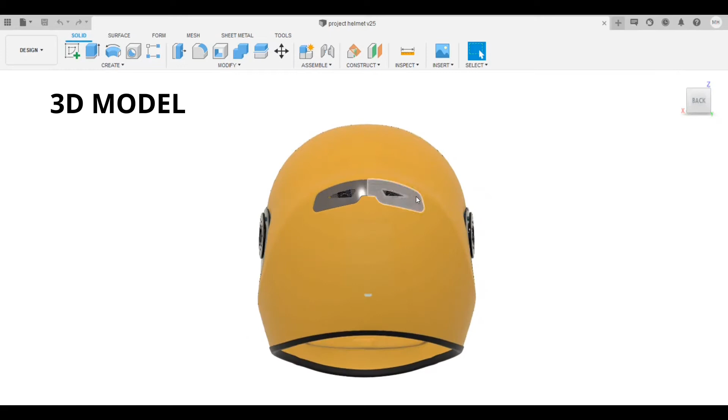Now, I will show you the 3D model. The LED will be placed inside the helmet, where the visor can reflect the light. You can see at the back part the placement of the sound sensors, and at the bottom there is a rechargeable module with the micro USB interface. Now let's see all the placement of the electrical components. You can see that all the electrical components nicely fit the helmet design.

Static stress analysis was performed on the helmet using Fusion 360 software simulation. The model of the helmet is prepared in Fusion 360 software, and it is based on the shell alone. Analysis is performed with 3 different materials. The first one is carbon fiber. The next one is ABS plastic, and lastly polycarbonate.

The designed product will be tested with a 3,432 Newton load, which is when the conventional fiberglass helmet has major deformation when the force is applied to it vertically. This is to replicate the hydraulic press.

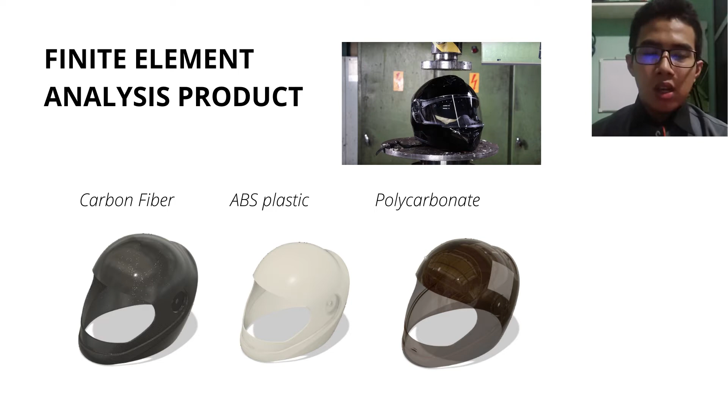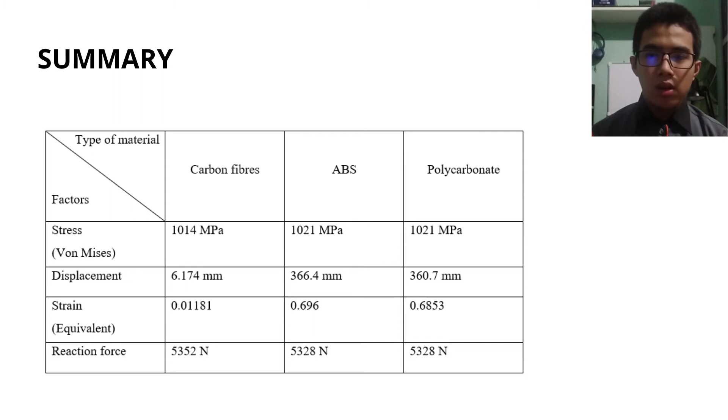From the result, we can conclude that carbon fiber is the most suitable material since it experiences the lowest stress, resulting in the lowest strain. Moreover, carbon fiber has very slight displacement compared to the other two that almost completely deform. Lastly, carbon fiber also has the highest reaction force.

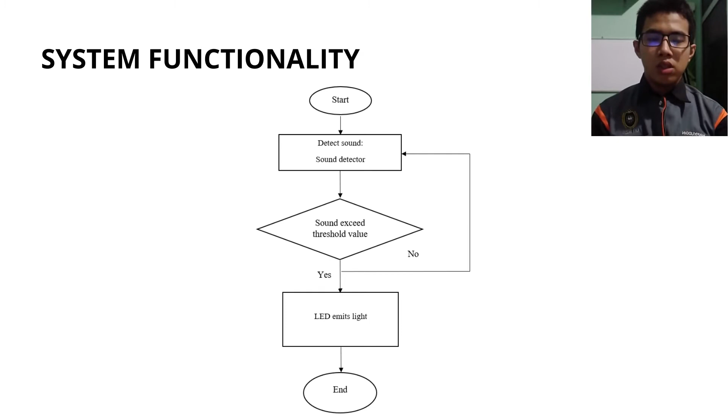How the system works is the sound must exceed the threshold value. Then the LED should flash light as the output. The sensitivity of the sound sensor can be adjusted using the potentiometer on the sensor itself.

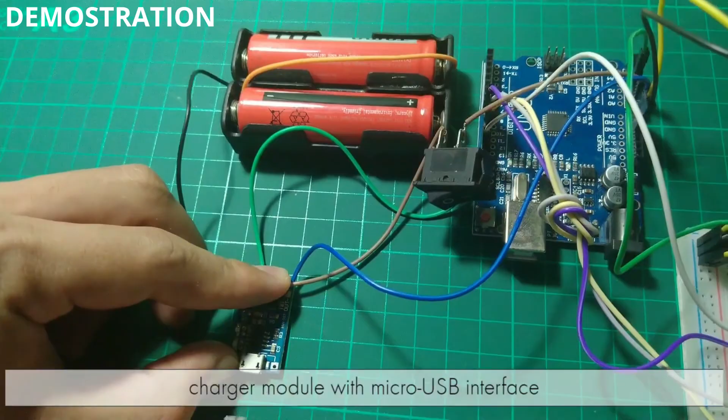In Malaysia, the driver is recommended to be 2 to 4 seconds behind the front vehicle. This is considered the safest distance. In order to test the functionality of the system, an experiment was conducted to detect a car horn and also a motorcycle horn at 3 different levels of distance, starting from 4.7 meters, that is about the length of an SUV car. The second one is 9.4 meters, double the original distance. And lastly, 14.1 meters, 3 times further than the original distance.

Typical car horns are rated at approximately 107 to 109 decibels. Meanwhile, a motorcycle horn is rated around 96 to 105 decibels.

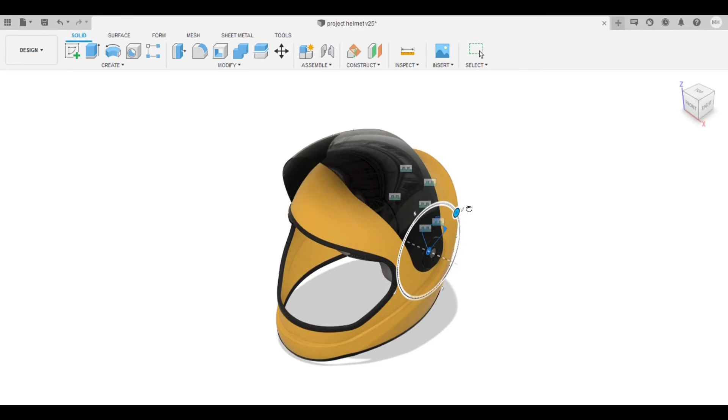For the joints, all the components are joined using rigid joints, and only the visor uses a revolute joint. This is to replicate the usage of a fastener, to make the visor able to open and close freely. For the rigid joints, most of the components will only use snap fit and also adhesive.

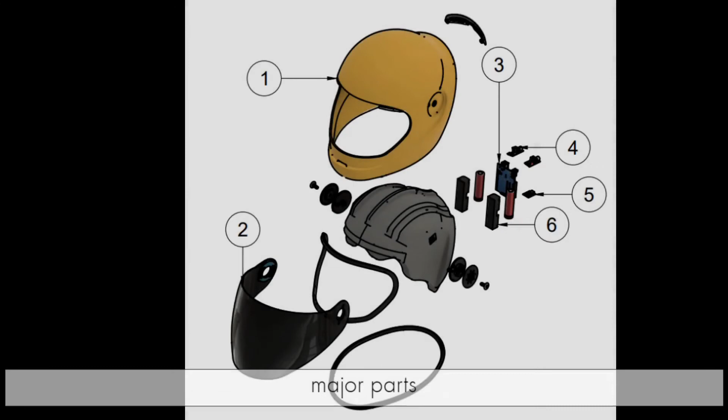For manufacturability of this design, the first one is the carbon fiber shell. One method of producing CFRP parts is by layering sheets of carbon fiber cloth into a mold in the shape of the final product. The alignment and weave of the cloth fibers is chosen to optimize the strength and stiffness properties of the resulting material. The mold is then filled with epoxy and is heated or air cured.

The second one is the visor, made of PC. Polycarbonate is an adaptable thermoplastic that's durable and pliable, able to be injection molded and thermoformed. Lastly is the inner padding. Granules of EPS, known as beads, are placed in a mold and expanded with steam.

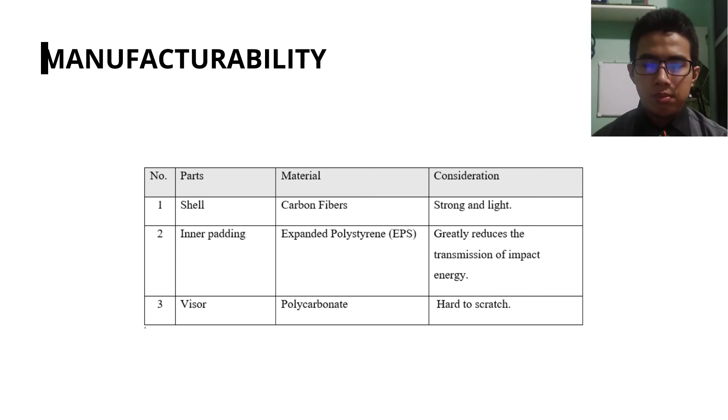A questionnaire was conducted using an online platform with a total of 134 respondents, mostly parents of deaf children. 97.8% agreed that a special helmet with an alerting system can help deaf riders notice incoming emergency vehicles. They are also willing to pay extra money for the helmet.